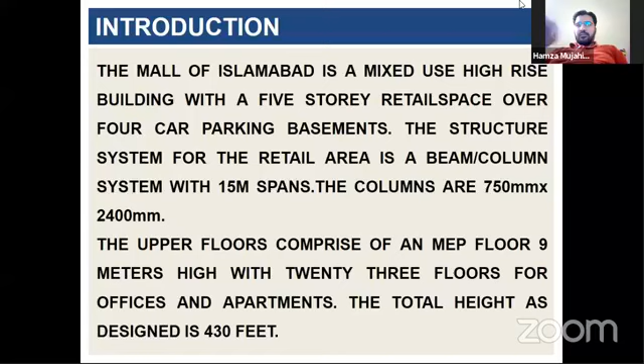It's a mixed-use development.

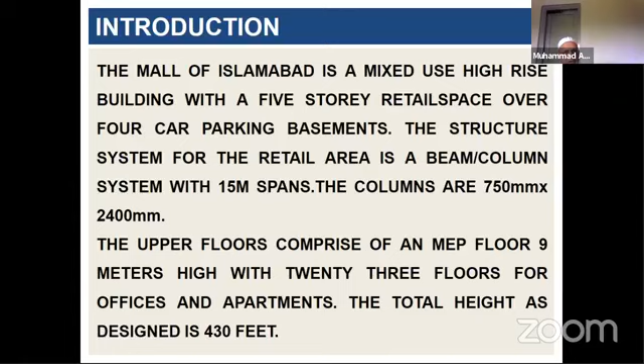So the structural system for the retail area is a beam column system with 15-meter spans. The columns are 750 millimeter by 2,400 millimeter, say 30 inches by 8 feet.

The upper floors comprise an MEP floor 9 meters high with 23 floors for offices and apartments above that. The total height is 430 feet.

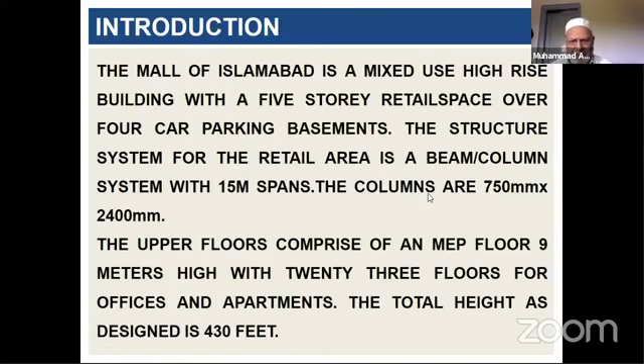The lateral loads are resisted by a dual system comprising special shear walls and an IMRF. The IMRF runs on the periphery and is capable of resisting at least 25% of the lateral loads.

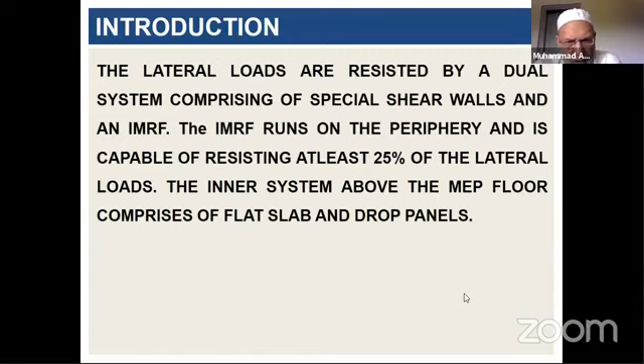The inner system above the MEP floor, which are basically offices and apartments, the inner structure does not participate in the lateral load resistance, and they are just designed for gravity loads.

The system is columns and flat slabs with drop panels, no beams except at the periphery, so that services can run without any obstruction.

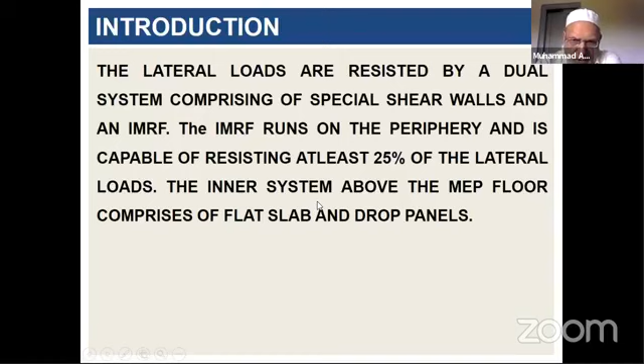Now what we have tried to do is introduce on the 5th floor, which is 9 meters high, the MEP floor, an outrigger system wherein the core walls are tied to the peripheral mega columns. This not only stiffens up the structure, reducing its first mode period from 5 seconds to 3 seconds, and a 40% decrease in story drift at the roof level,

but also lays the foundation of a transfer structure, whereby the location and size of the columns in the office and apartment floors above are independent of the large columns in the retail below, which were necessitated by the requirement of having large clear spaces in the retail. The small sized upper columns, above the MEP floor, the upper stories, are now detached from the lower ones through the outrigger and transfer structure.

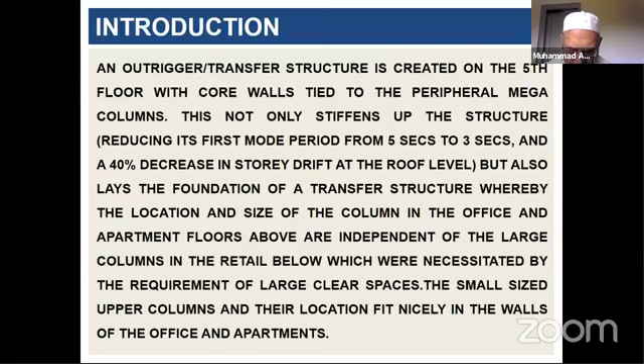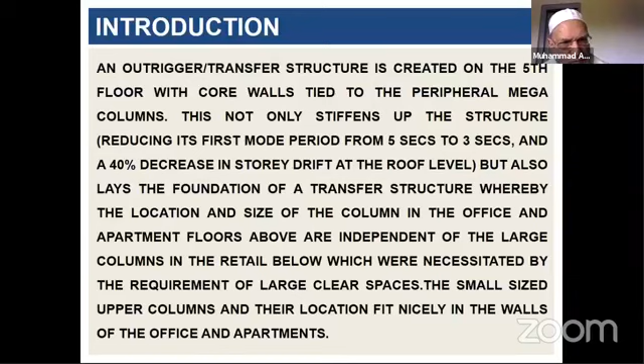And so we can choose the spacing and the size. We chose the spacing from about 18 to 20 feet, and the small columns fit in very nicely in the office and apartments and are not an eyesore.

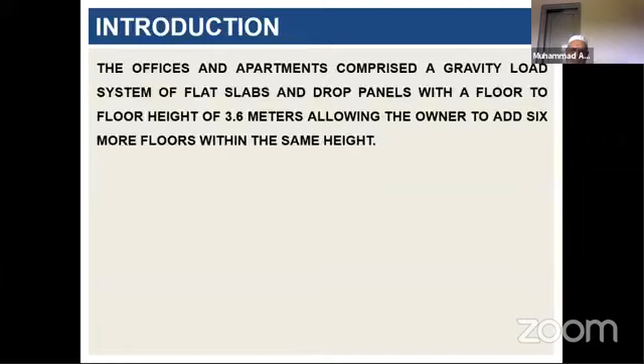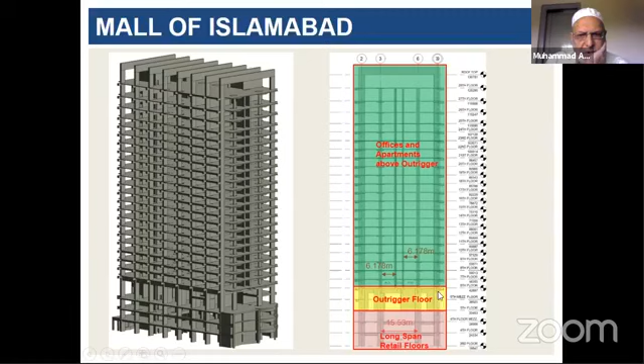You can have a look at the planar view. You have an outrigger structure here and long span retail floors below and short span apartments and office floors above.

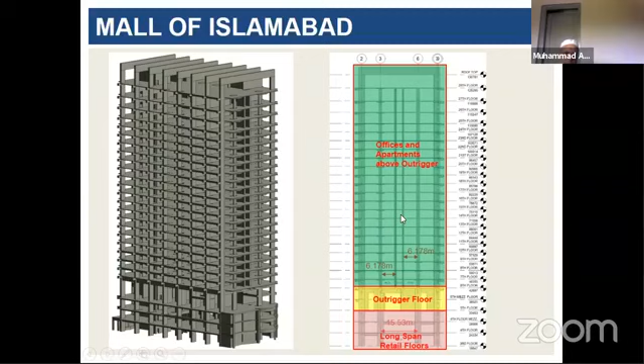Now, all this modeling has been done on Revit. This is a Revit view of the outrigger structure. You can see the large shear walls connecting the internal system with the columns at the periphery, and also you can see the columns above. They are smaller and not necessarily in line with the columns below. So we have a lot of space to play with above the outrigger structure.

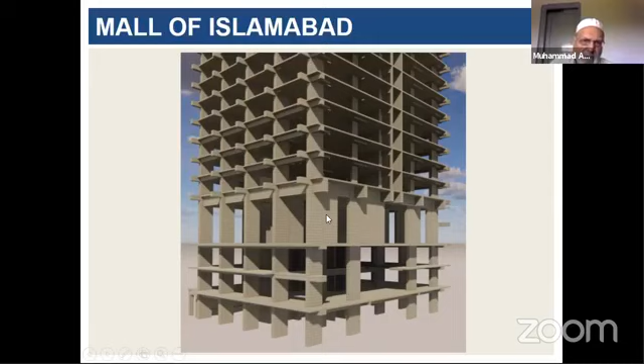And this again is another view of the same. You can see the transfer structure here. First we were only interested in putting an outrigger structure, but secondly, when we thought, why not use it as a transfer structure also, because the size of columns was too large to fit into office and apartment floors.

So these structures or walls you see here, they take up the load of the upper 23 floors, and they are 9 meter high. And then they finally transfer it down to these mega columns, which take them down through the basement into the next.

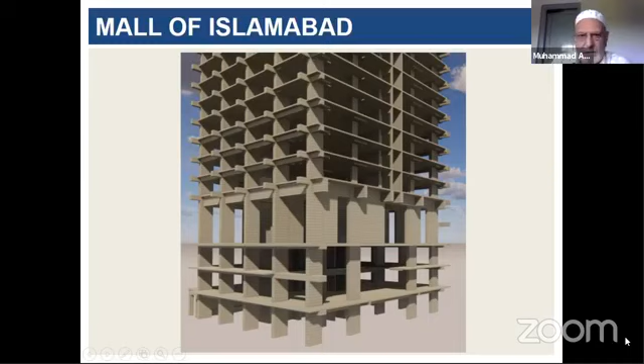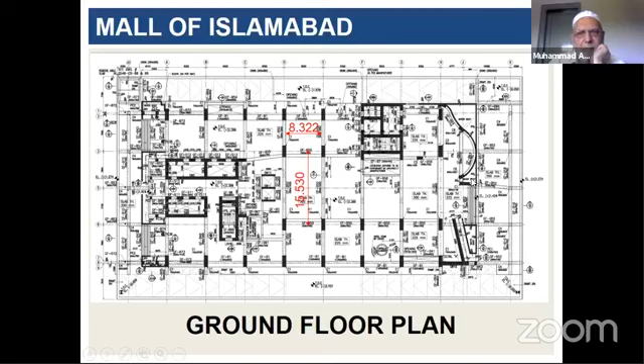So just to make it clear, this is the ground floor plan view, and you can see the core walls. You have all these lifts, some going to the office floor, some to the apartments, high-speed lifts. And these are the mega columns which support all this retail area, and we could not afford these in the upper area.

So we used these shear wall connections from the core to the mega columns, here and here. This space is not empty. It has an opening for equipment, but a 2 meter beam runs over it, which is designed as a coupling beam, so that the pier strength and pier capacity of withstanding lateral loads is not compromised.

Now, this is another view of the same thing. It can be clarified.

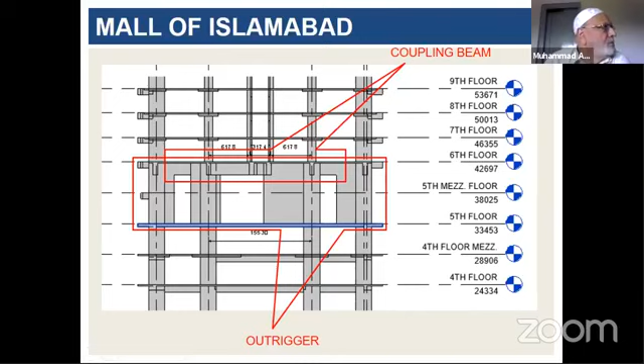Yeah. You can see these are the coupling beams which join the two sides of the piers. So this pier may be considered as almost 75% continuous, and then these lead up to it. We carried up the mega columns from the outer periphery right up, because we needed them to resist shear forces also.

Durrani sir, 3 questions. Yes. The first question is from Muhammad Imran. He's asking, how deep is the foundation of the Islamabad outrigger structural system?

I mean, the foundation of the outrigger system, there is no foundation. It just picks up from the slab and has enough strength to support the slab also, and rests on columns which are, as I earlier mentioned. But the entire structure is carried on a 1.8 meter piled raft.

That's also a special system in which we use the bearing capacity of the soil in shear, which is quite large, but the corresponding settlements are also quite large. So we use these piles as settlement reducing piles. Their stiffness reduces the settlement of the raft to less than 2 inches. So this, we run for compatibility of displacements between the soil, the pile, and the raft.

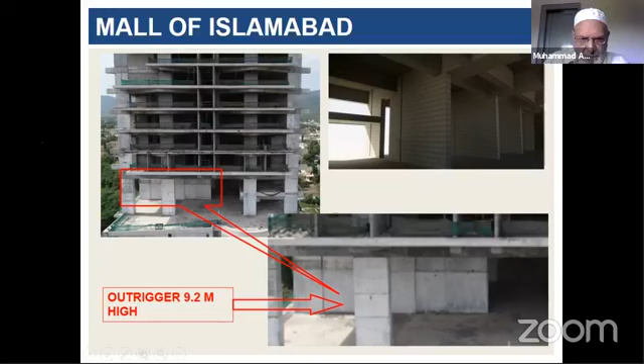Now, here I get the plan. And I think there is a comment related to this question, that is, you mentioned about the shear wall transfer system on the 5th floor. How does it work? Yes.

As we can see, we have this core wall, which is probably 24 inches thick at the ground floor level, and we have this core wall again. So when we go up, these shear resisting elements are retained. The structure is literally restrained by these large cores, and the earthquake forces go to that. It is a prime rule that the structure supposed to support the transfer structure above should take no earthquake forces. Otherwise, there will be an unbalance.

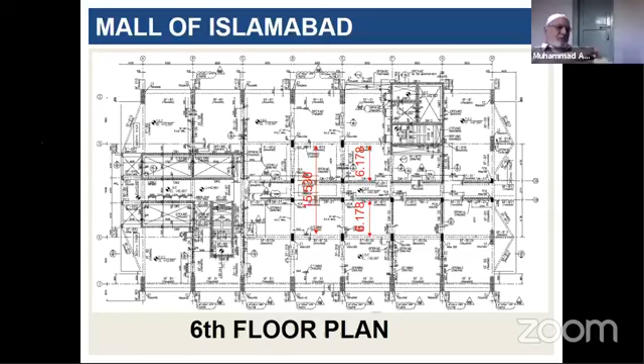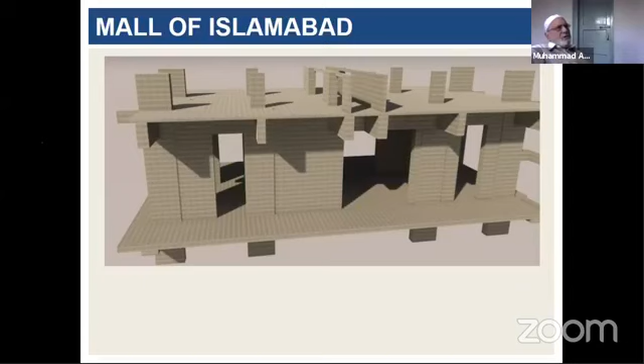In addition to providing a transfer system which is useful for upper floors - now these are all Revit modifications. Now you can see this, this is the office upstairs. You can see the size of the column is decreased, and it's a non-earthquake resisting, non-lateral force resisting column. It just resists vertical load.

Durrani sir, question please. Sir? We have a question. Yes, sir, please. As you know, mashallah, today we have about 13 viewers on Facebook. Our transmission is going live there. Now, right.

Mr. Kamran has asked the question: how do you detail the columns that are not meant to be part of the lateral force resisting system? Yes.

There are 2 ways. If you run this analysis with the outriggers and the cores, there will be precious little shear going into the columns. So you don't have to specifically detail them because there will be no lateral load. Otherwise, you can create a hinge between the column and the roof. The diaphragm is then not transmitting any moment into the columns.

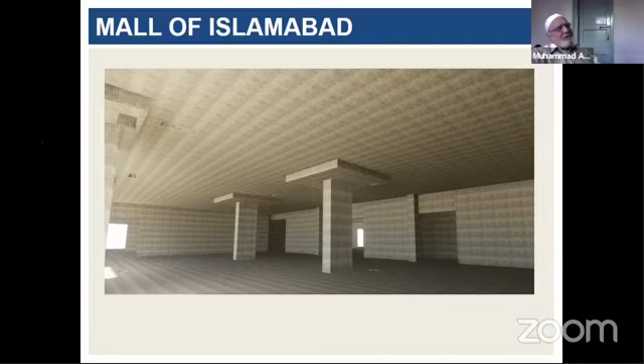As you feel convenient, Durrani Saab, just answer the question and move ahead. If the person is not satisfied with the answer, he will again supplement his question. No issue, you continue with the flow. He can go ahead, because I will answer this.

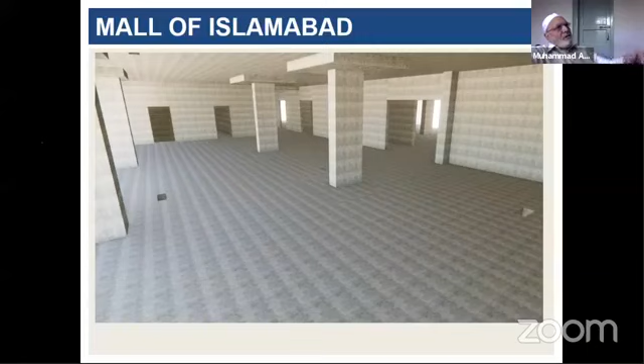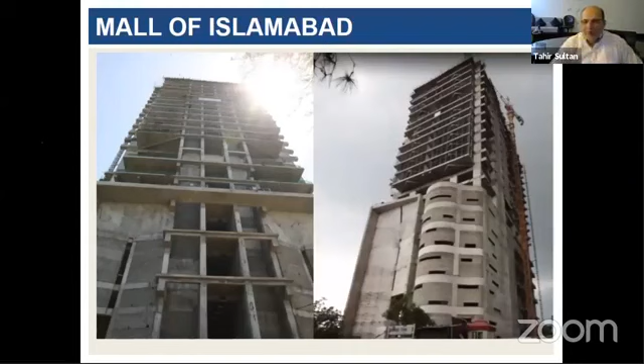The building is now almost complete. Structurally, they are finishing it.

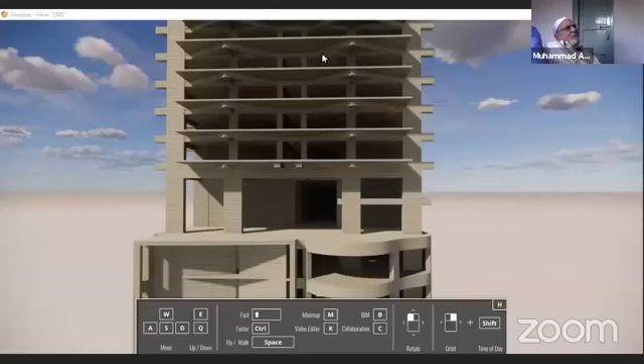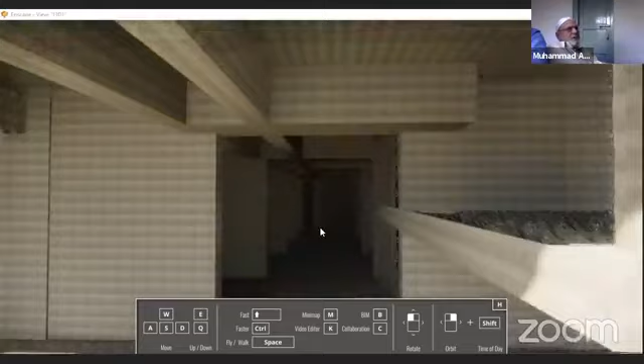Now this is another view of the same thing. Since the system is changing over the floors, we just wanted you to appreciate how it looks like from the inside.

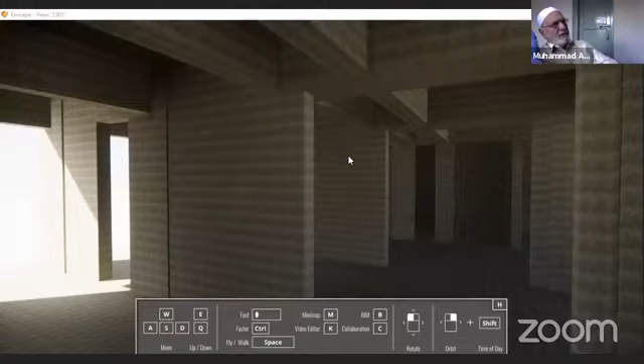This is another view of how the outrigger works.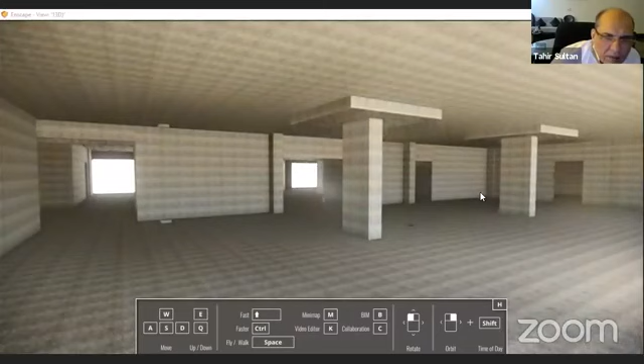Durrani Sahab, as you are showing the pictures, just answer a small question again. Mr. Kamar Ali Zaidi has asked about bearing capacity, so I wonder if he's asking the value of the bearing capacity.

We are 4 basements down and the gross bearing capacity is around 2.75 to 3 tons per square foot. But the ultimate shear capacity of the soil is 9 tons per square foot.

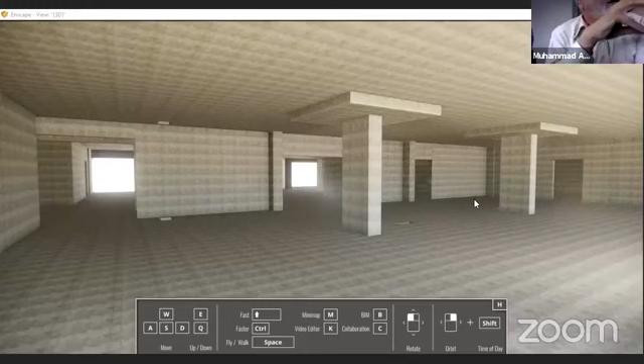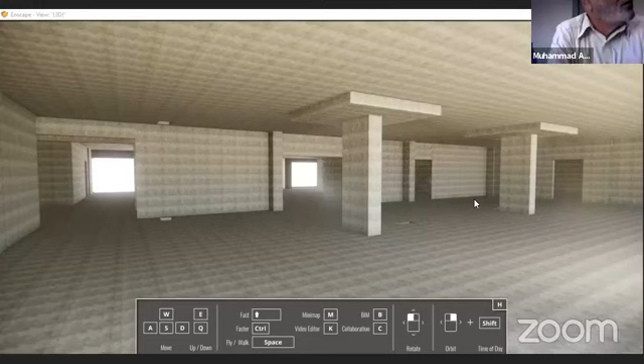If you apply a factor of safety of 3, you get something like 3 tons per square foot, but the settlement is large. So to counter the settlement, we include piles, which if you model them as springs and apply the load from the top, the settlement of the entire raft starts reducing. Otherwise it would have gone to 250 millimeters without those piles. So those piles stiffen up the soil, increase the bearing capacity, and decrease the settlement.

Does that answer the question? Sir, should I move on, or is there a similar question elsewhere? No, Durrani Sahab, please continue with a free flow, no issues. Whenever there is a need to interrupt, I am there to interrupt you. Please go ahead with your convenience.

Thank you. Now coming back to this, what is an ideal structure from a structural engineer's perspective? We call it the zero premium structure, which means a structure designed for gravity loads does not require further strengthening for lateral loads. As we know, there are different load factors for gravity loads alone, and gravity loads acting in conjunction with lateral loads. So the ideal structure is one worth striving for, but even if it has a premium of 10 or 15%, I personally won't mind.

The system should be designed such that the gravity loads as they are would require a certain amount of reinforcement, structural members, concrete and steel. But when we go into lateral loads, the load factor of the gravity loads diminishes, almost goes away. For instance, the 1.6 factor for live loads diminishes to 0.5. So when we add earthquake forces, our desire is that the reinforcement requirement should remain as nearly as possible as for gravity loads alone.

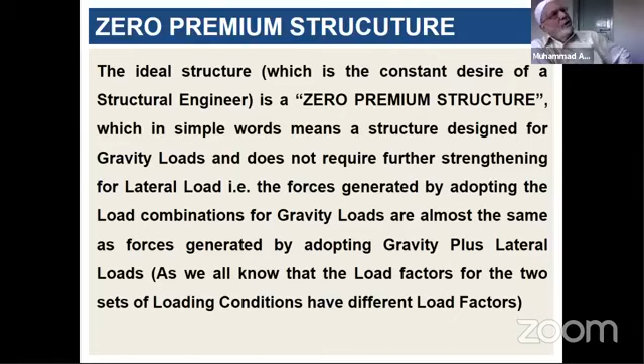Now these are the various factors, I'll just quickly run through. This is all textbook stuff, but let's move to the next slide.

Durrani sir, we have a question from engineer Hamid Ismail. He is asking for a pile raft system design, and from a geotechnical standpoint, what are the geotechnical precautions and recommendations necessary for a safe and economical design?

These pile rafts were very common in Europe for the last 30 years, especially buildings in Frankfurt. The Americans were hesitant to adopt it, but now they have adopted it. It is quite a laborious thing. Poulos has written quite a few papers on that. It has become now almost a standard practice. Now what we have to consider,

the interaction between the pile, the soil, and the raft, that has to be incorporated. In each case the system should be iterated so that all three displacements of all three elements are the same. This would require a lecture on its own, actually—it's a complex thing, but I'll just run through it. When the raft transfers the load to the soil, obviously it settles, but there are piles on each side.

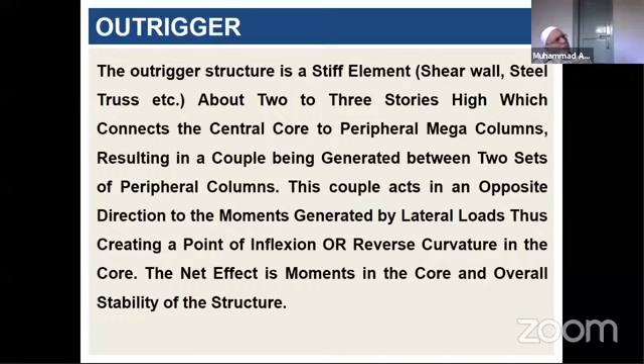So, do I answer the question?

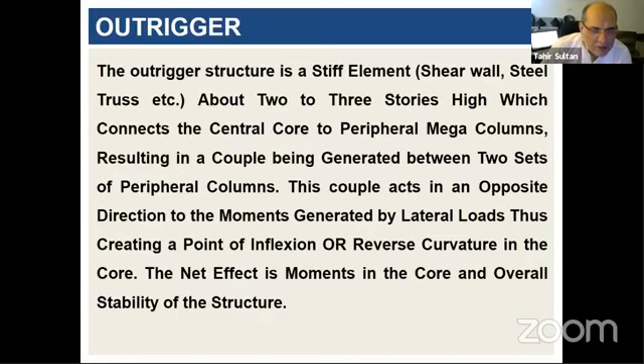Now I just want to quickly address the question: what are high-rise buildings? A high-rise building can be anything. I would classify in Pakistan something like 25 stories and above as a high-rise building. Because according to the CTBUH, which is the Council on Tall Buildings and Urban Habitat website, any building which requires, due to its height, special systems for its stability, economy and workability, is classified as a high-rise building. So anything which requires things like outriggers, etc., is a high-rise building, if it requires that and it is not imposed.

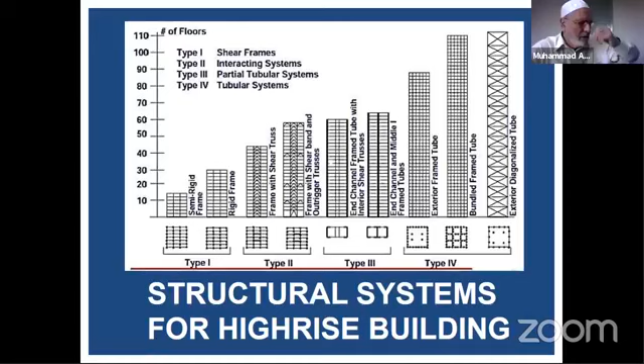Most of this was created by our Bangladeshi brethren, Fazlur Rahman Khan, who used to work for Skidmore, Owings and Merrill. He did this work in 1956. He is still called the father of high-rise buildings.

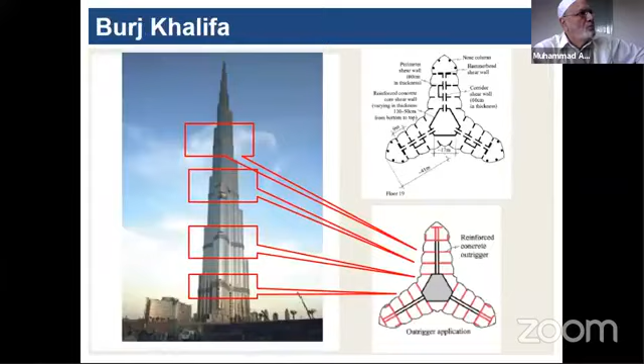So I just want to go over some analytical stuff so that one can understand what it is. Now this is a shear core, and this is an outrigger structure. And this can be any material, like I said earlier, trusses or concrete or shear walls or whatever.

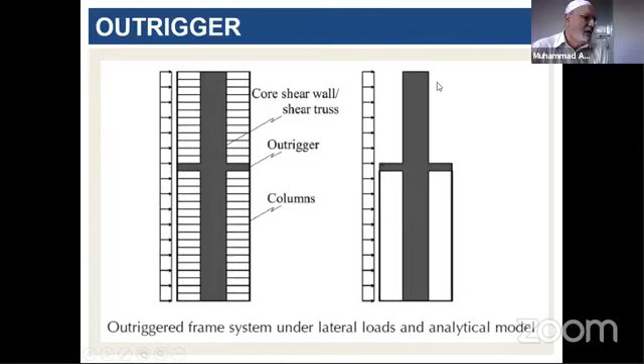Now we have an idealized form of seismic load. What happens is that the shear core acts as a cantilever, so its deflection is a function of the cube of the height of the shear wall.

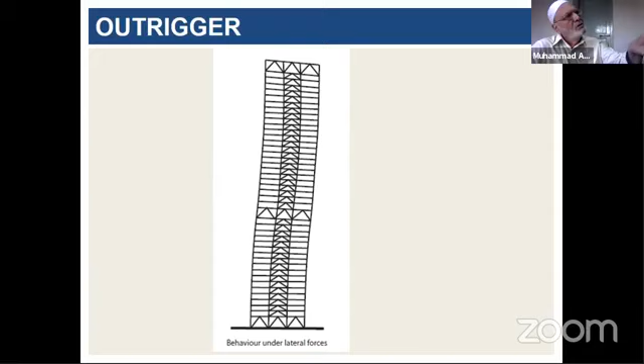Now if you introduce outriggers here, the curvature of the wall is modified, and the peripheral columns take part in bending, hence reducing the bending moment in the shear wall. This is the principle on which the outrigger system works.

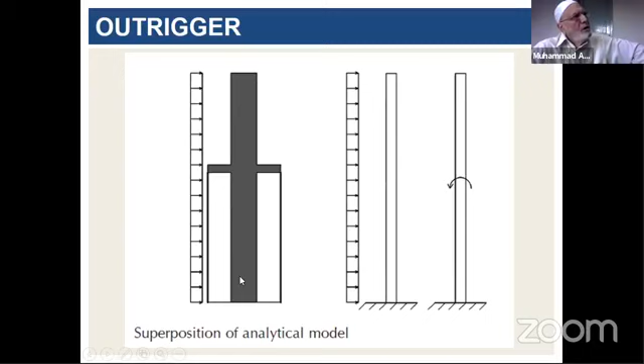In other words, it creates a spring here, which is in the opposite direction to the moment created by the lateral forces. So there will be compression in one column, maybe tension in this column, compression in this one. This will form a couple, and resist and reduce the bending moment in this core, as well as modify the curvature.

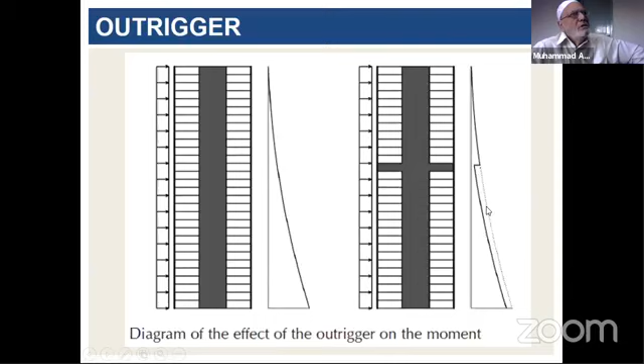So this is how we define it. You can see this is the shear wall. Had there been no outrigger, it would have deflected by a function of L cube.

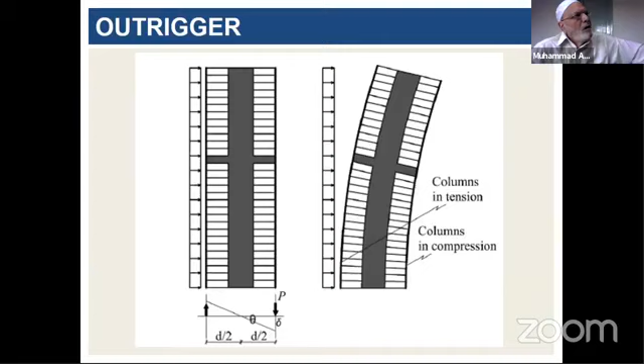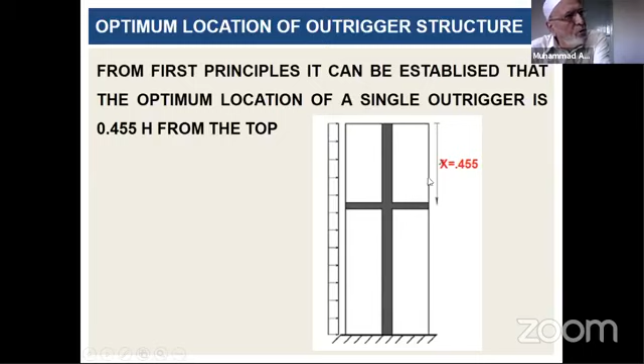With the outriggers in position, I will next show you how they affect it. If you just want to put one outrigger in a building, the optimum position can be checked from first principles and closed form equations. There's nothing very special about it, though some assumptions need to be made. The position of the outrigger should be something like 0.455 times the height from the top. And if you want two of them, the optimum place to put the outriggers is 0.69 from the top and 0.31.

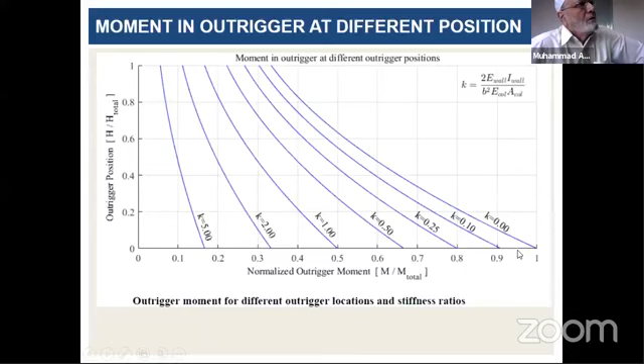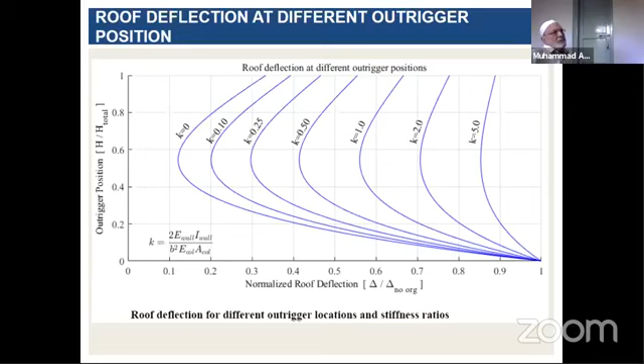Now you can see here the roof deflection. Delta is with the outrigger in position, and this is without the outrigger in position. So again, if you have a K of 0.5, you are reducing the top deflection by 45%, which is quite a lot. One of the reasons for adopting this was to reduce the earthquake and wind acceleration at the top.

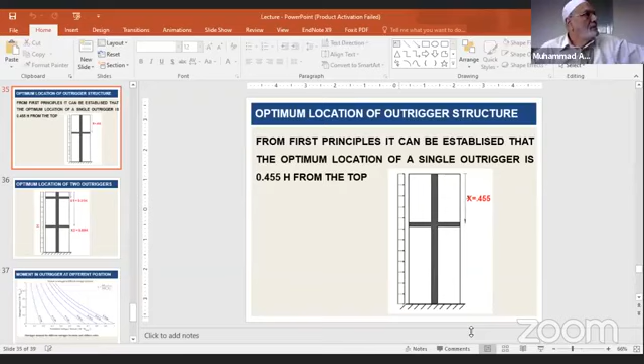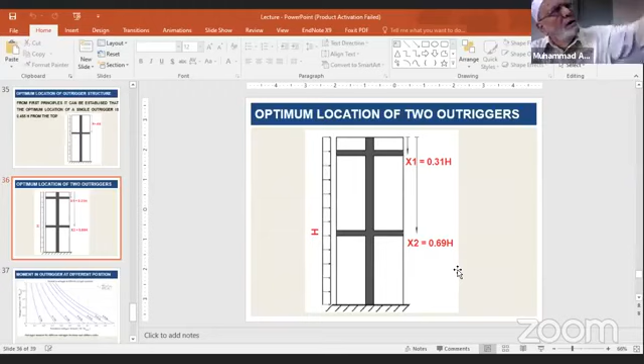This is the optimum location of two outriggers, if you have the luxury of having two points. Normally in buildings about 60 stories or 50 stories, they do provide more than one MEP floor. They have their own problems of transmission of fluids, and water tanks to be placed at mid height so that there is not much water hammer or things like that. So if you have the luxury of providing two of them, this is the height where you should provide them.

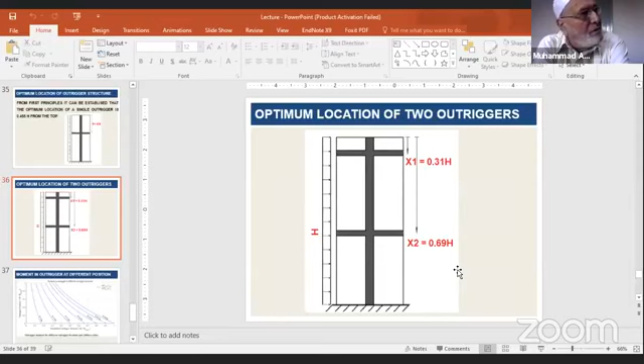I just showed this to give you an idea. This equation includes the Young's modulus of the shear wall, the core wall, and its moment of inertia. The bottom term B is the distance between the outer columns, whatever the width of the building is. This and this are almost the same because the shear core and the columns have almost the same Young's modulus, and this is the area of the column. So the lesser this quantity is, the more stiff your outrigger is.

Now, if you provide an outrigger here, and you have a very stiff system which gives you a K of 0.25, this value, because the column area is large compared to the inertia, the K value turns out to be small. So if you use this curve and place your outrigger at the optimum location, from the top, so from the bottom it would be something like 0.5 here. So if you go here and you have a K value of 0.1, you come down, you will have an outrigger which takes 55% of the total moment. Only 45% goes to the shear wall, which lightens it up quite considerably.

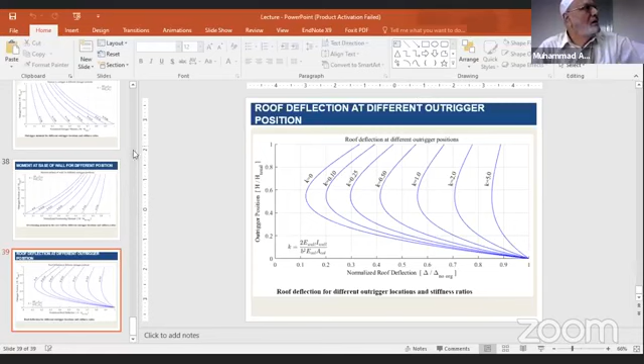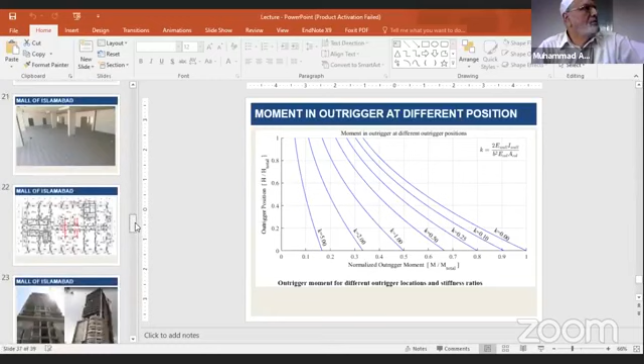No, there is no transfer column which rests on... I doubt if there is any column which is resting on anything directly. They all rest on walls. They all rest on walls.

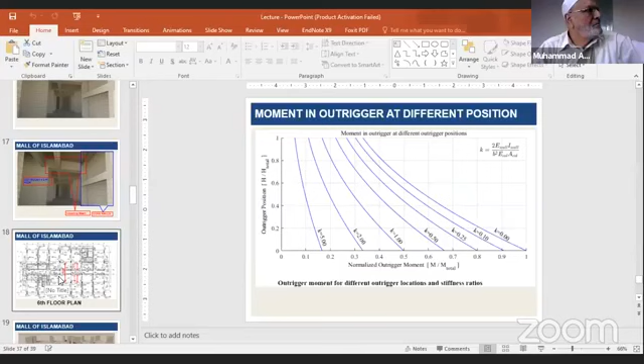Now the shear walls, I'll go down first.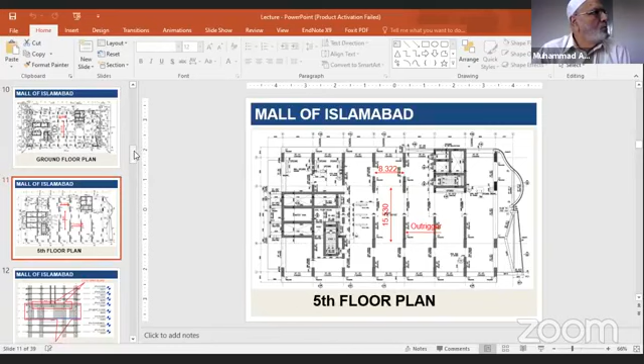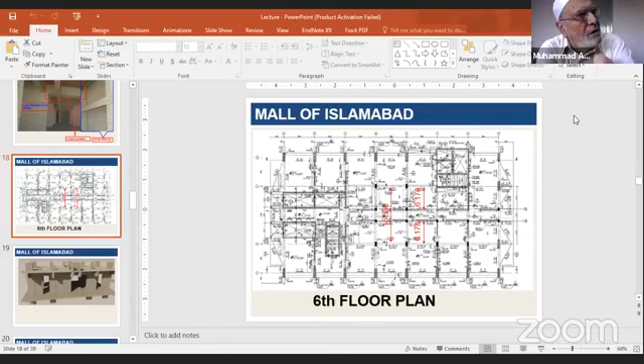Now I come to the floor above. Now all these grids have shear walls. So apparently there is no column, because we kept the grid upstairs, we put the shear walls on the grids. So all these columns in between at spacing about 6 meters, these columns all rest on shear walls.

So there can be, as I said, the discontinuity in the shear walls, as was shown on the Revit model by rotation and looking at it from the inside. That opening, if I understand correctly...

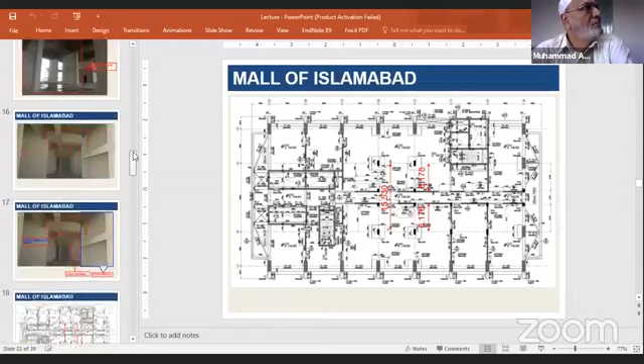Now this is it. Now this is not a slab. This is a 2 meter deep coupling beam.

You can see this. When there is equipment placement, we have to leave some space, and we have to provide an opening in the wall. Now, above that is a 2 meter thick beam with a very small span, maybe 4 or 5 meters.

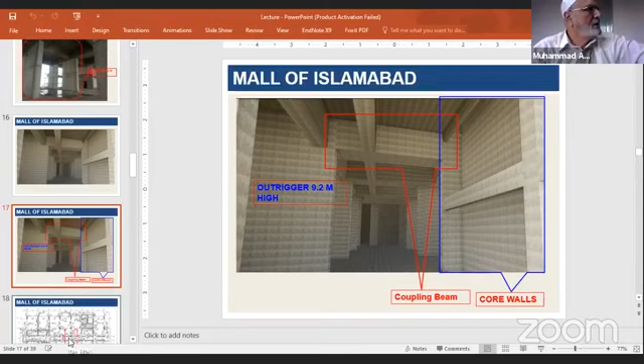There may be some columns which come on this, but this again is part of the transfer structure. Most of them will come on the grid lines, and all these columns are on the grid lines. On the grid lines, you have either a through shear wall, 9 meters high, or where the spans are small, a beam 2 meters thick with a span of just this, so that it does not deflect and transfers the load onto the shear walls, which are 9 meters high.

And these, as I said, are only transfer structures, and these are not outriggers. Do I answer your question, sir?

Yes, sir. Next question is from Facebook, from Mr. Ehsan Sattar. Why are the core walls unsymmetrically arranged? There must have been architectural constraints, but outrigger systems rely on push-pull action of edge columns against central core. How is torsional movement controlled for this building?

This building had a requirement because it was feeding two sets of occupancies, one for office and one for apartments. And the architect deemed it necessary to separate the cores.

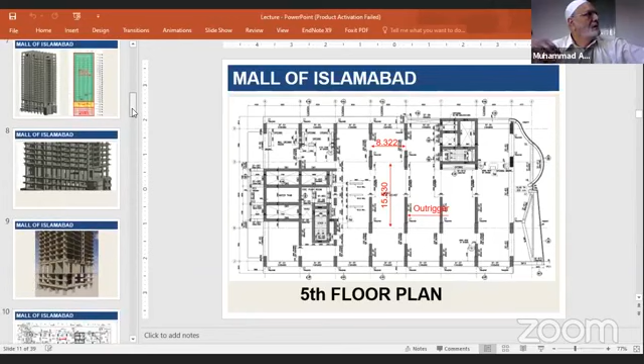Now the shear walls above are transferring loads to these 2 columns, and all columns which are not even part of the outrigger.

Now, when they transfer the load to these columns, they are designed for a shear force of omega, which is 2.5 times the shear force being transferred.

This is directly from ASCE. So you have an overstrength factor, and you can't live without that, because you are transmitting loads from a continuous wall to discrete columns.

So the code requires that whatever the shear is, notwithstanding the normal load factors, you multiply it by 2.5 and design these columns with stirrups from the top right to the bottom.

And this, I mean, the redundancy in the system is taken care of by this. Discontinuous shear walls transmitting load to the column will have an overstrength factor of 2.5. I think that would answer the question.